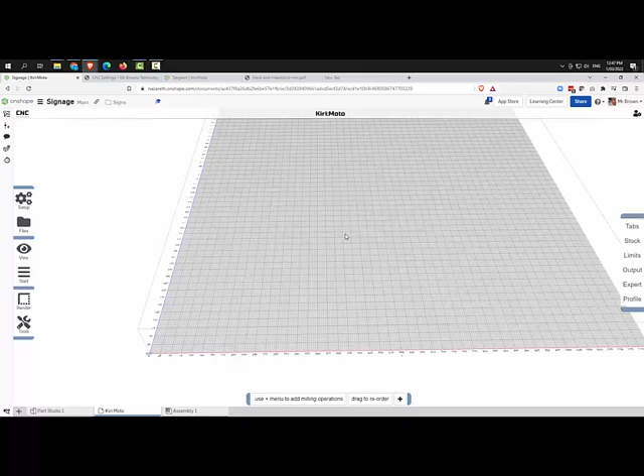Alright, so the first thing we need to do is import our file. So just click Part Studio Part 1, and it should come in after a little while. There's our sign. If you click it, it's selected, and if it's yellow, it's not selected. So make sure it's green. Right click and you can lay it flat.

This one here is actually the wrong way around. So if you think about the grid, that's like the table, and up above that's where it does all the cutting. So if you put it on like this, it wouldn't cut the sign out. So I'm just pressing down arrow on my keyboard twice to flip it around, and you can use the arrows to do all sorts of fancy things with it.

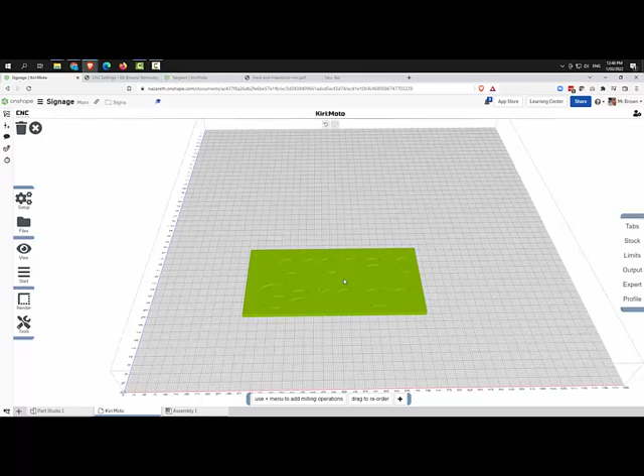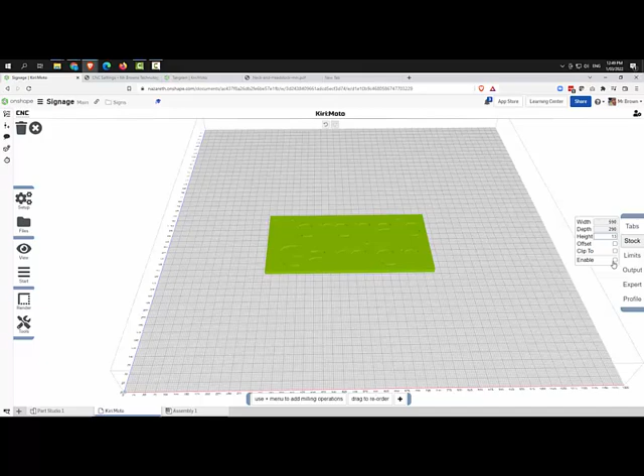Alright, we're going to go over here to stock. Our stock is 600. Actually, it's a little bit smaller. It'll probably be 590 by 290 by 13, and click enable. So you can see here there's a bit of a shaded section, and that's the size of our stock. You'll also notice that the 0 point is still in this corner.

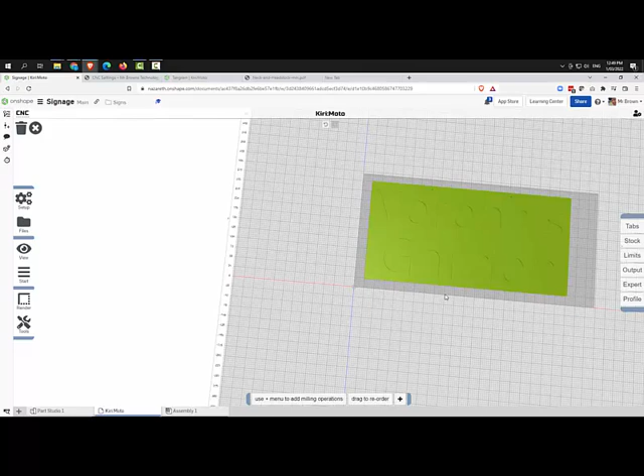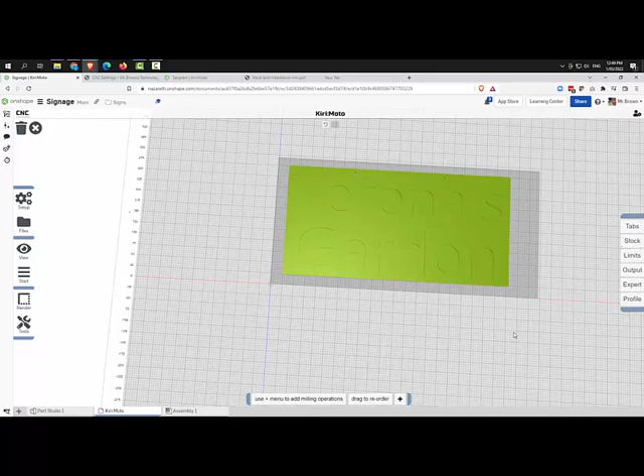So what we're going to do is move our stock up. When I'm using the CNC, I like to position one of these grids away from the edge, because we need to actually fasten down this piece of wood. So we'll need to put a couple of screws in or put some double-sided tape under, and it's good to have just a little bit of wiggle room with all of that stuff. So we've got ours. It looks like it's flat on there. Perfect.

Another thing that we need to do is add some tabs. So tabs are when the CNC leaves a little bit. So what we're going to do is go to tabs. My width is 5. The height and the depth don't seem to matter too much. And we're just going to click plus. So then we're going to come around to the side and we'll just chuck 4 on. 1, 2,

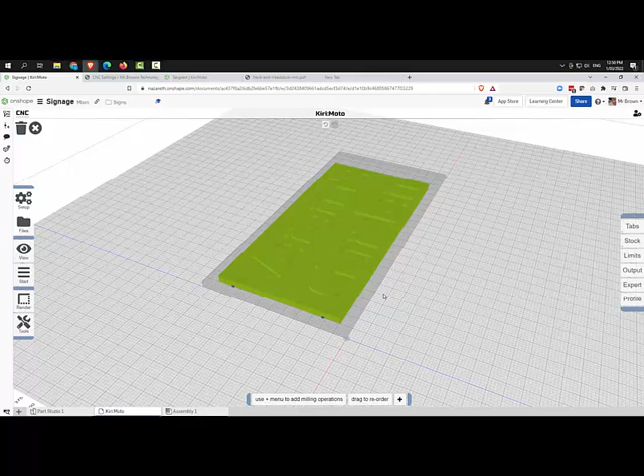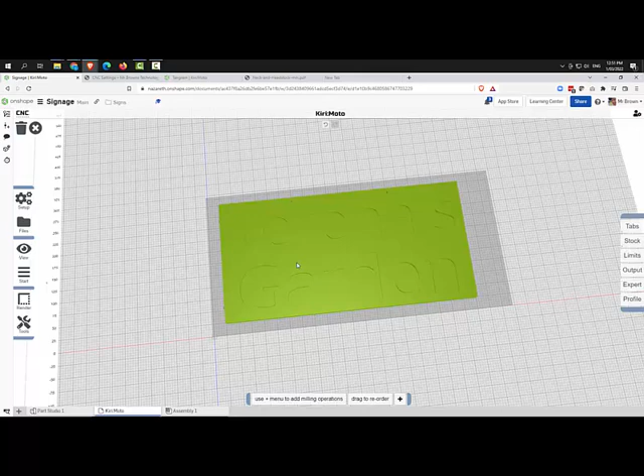3, and 4. If you didn't put tabs, the machine would cut the whole thing out. And because it's spinning at 18,000 RPM, when it cuts the last one, it'll grab it a little bit and move it, and then the sign will be in the way of the cutter, and it will cause an issue. So make sure you use tabs, 4 tabs please. I'm putting them on the edges here just to be a bit safer. Might even move this piece just a little bit in. And once you're finished with the tabs, just click the tick.

The next thing that we need to do is to start doing our operations. So this is sort of telling the machine what we want to do. So we're going to go plus. The first thing that we're going to do is cut out, actually no, we'll drill the holes first. The 2 holes at the top, we're going to drill them first. So we're going to go up here to drill.

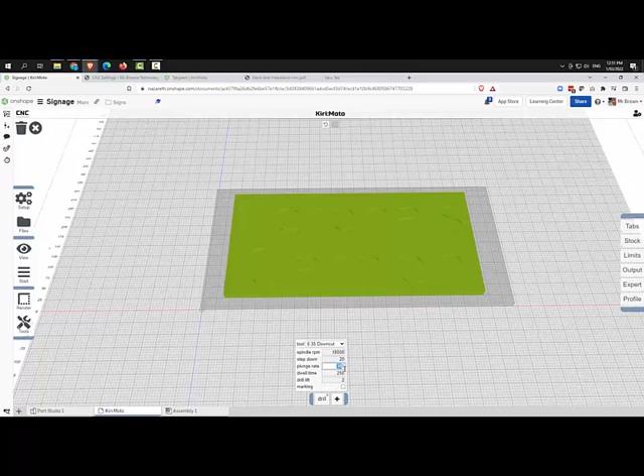Our tool, we select our 6.35 down cut. All of your stuff should look the same as this. 18,000, step down 20, plunge rate 300, dwell time 250. Actually, we'll make that a little bit longer, 350. So that's milliseconds. Drill lift 2, and marking, we're not going to mark it.

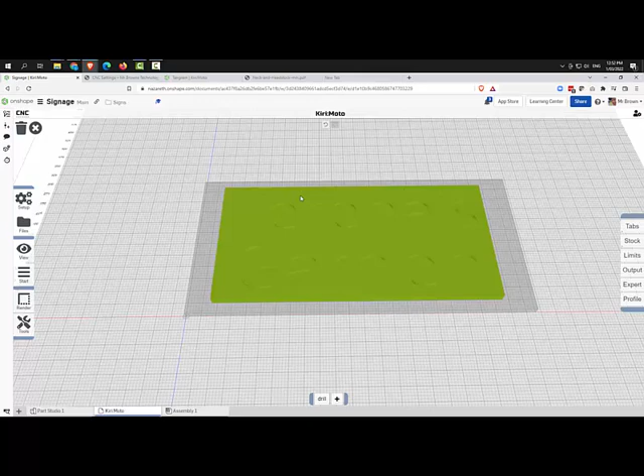Alright, so just to give you an example of what happens, here you can see the 2 holes. So if we preview what we've done, you can see this is the path the machine will travel. So it'll come here, drill down, go over there, drill down, and think that it's finished. So we've still got a fair way to go as far as cutting out this sign.

The next thing we need to do is cut out the letters. So for that we're going to use what we call a roughing pass. We're going to come here, make sure our 6.35 down cut piece cutter is selected. Our step down is 6.5. Our step over is 0.8. Feed rate is 1500. Plunge rate is 300. So that's millimeters a minute when they're talking about speeds. So feed rate, plunge rate. Leave stock 0.

Yes, we don't want to leave any extra for a final pass. We're just going to take it all off. And clear voids is the one that's ticked here. Alright, you can also just go inside only. Alright, so let's preview that.

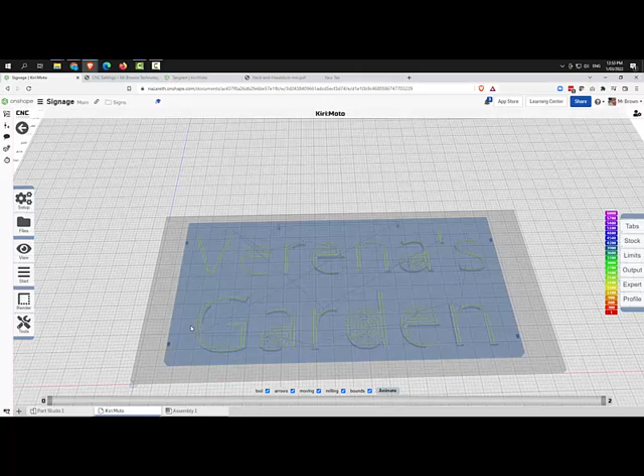So you can see that the machine wants to drill these holes, and then it's going to come over here, cut the G, and then it's going to, what's it going to do? It's hard to see. It's going to come out of the G, cut the A, and then cut the R, cut the D, and then it's going to work its way around like that.

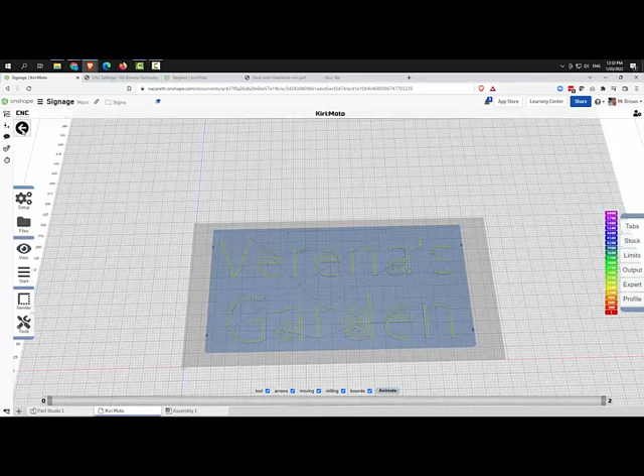Alright, so there's only one thing left to do now, and that's just cut out the sign. So if you're in this mode, just click the back button. We're going to add outline and 6.35. Our spindle RPM is 18000. Our step down is 20. Feed rate is 1800, so 1.8 meters a minute. Plunge rate is 200. And outside only, that's what we want to click.

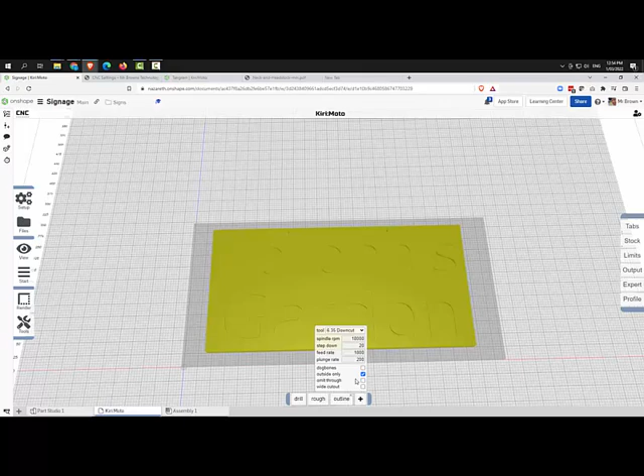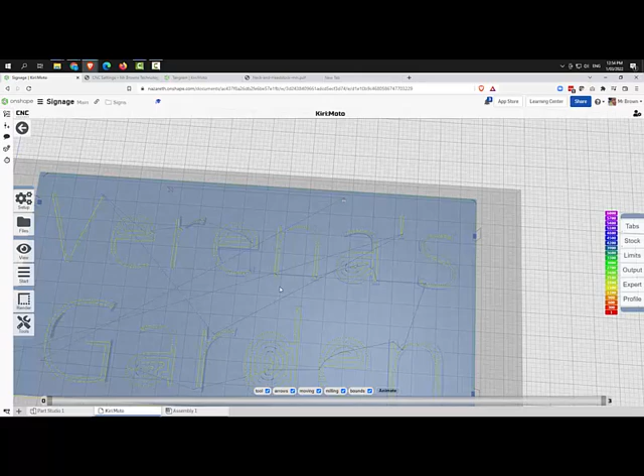Dog bone sounds funny, but it's for inside corners, and we don't really have any inside corners on this. And the rest of it is all good. So now we're going to go and preview, and you'll see that it wants to cut the holes, cut the G, A, R, D, and then go around and cut. And you'll see where the tabs are, that the machine comes straight up and just goes around. Alright, so we're not going to have any issues there.

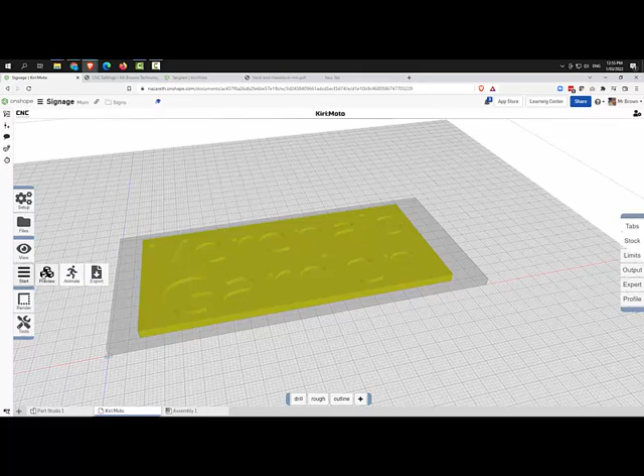You can animate it. So if you go back out here and you go animate, it'll do the same thing. This is a computer generated version of your piece of wood. Press the play. Is it working? No, it's not working. I wonder why. I'm not sure why animate isn't working for me at the moment. I'll try it again, but I think it's unlikely. Preview first. Yep. Go to animate.

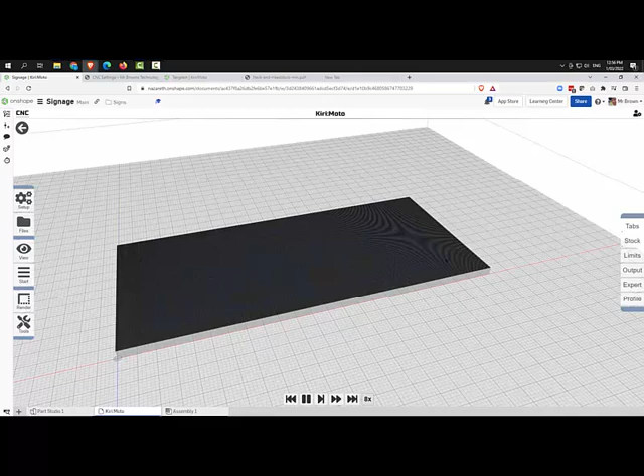No. Usually you see something representing the cutter, and then you press play and it starts moving around, but it's not happening today. Alright, so I think I've got it working just by refreshing the page. Yep, so you can see the cutter is moving across, moving relatively slowly. You can speed it up to 8 times, so you can see it's going to do those 2 holes first,

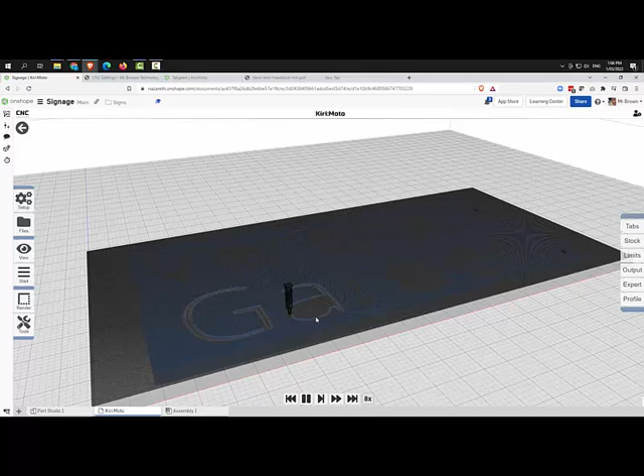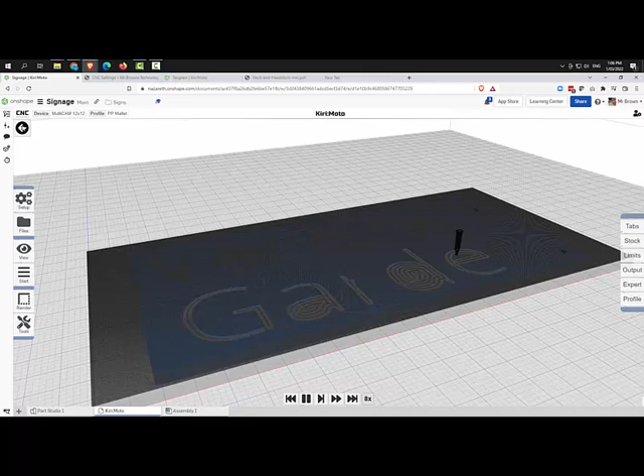and then it's going to cut out the G, A, and then basically go through and do all that, and the last thing it should do is cut the actual piece out. So this can be good to do if you just want to see exactly how things are going to work. But I think we've seen enough. Hit the minus button. So when you're actually ready to export it, you just basically come in here, click export.

Now I have a sort of filing convention. So here's how I want you to call your sign. So I'm going to call this one Mr. Brown, so it's going to be your name, sign, dash. We used the 6.35 bit. You can't put a point in the file name, but you can do 635, and then a dash, and then the thickness of our piece is 13 millimeters. So put that in, dash, and then this is the first one, so I'm going to put V1.

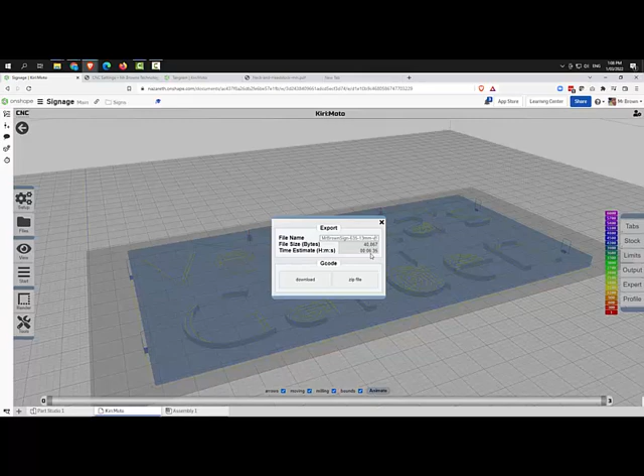So what I'm basically saying is this is a description of what it is. This is the cutter that you need. This is the piece that you need, and it's version 1. The machine's trying to tell us how big the file is going to be, which doesn't mean anything these days, and it's going to be 6 minutes 35 seconds. And we just download it. It's not worth zipping it. So yeah, just save it.

The next video, we're going to go through and just check what we've done, go through the G code and make sure that it's in the right format.